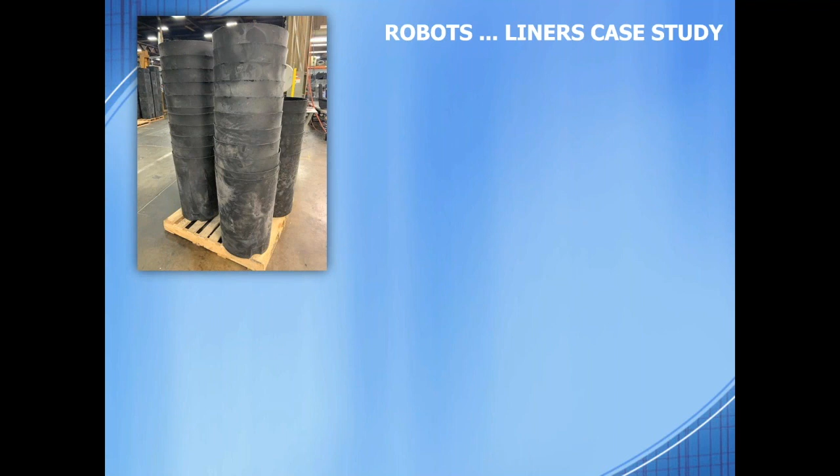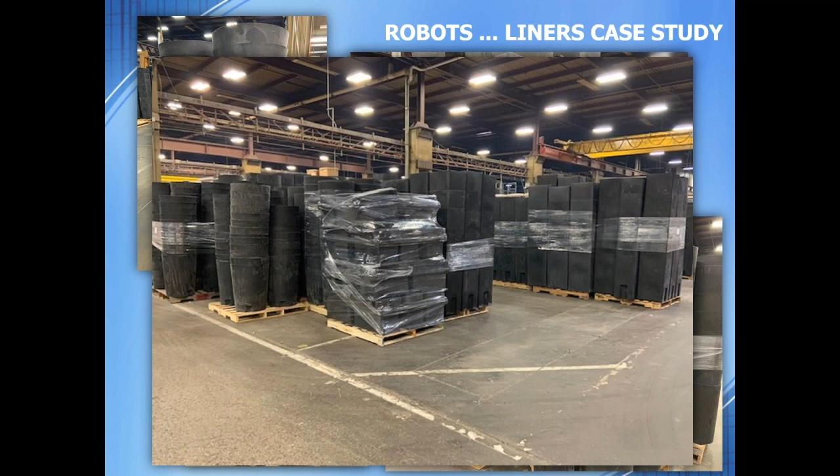We make a lot of liners. This morning I took a walk through our facility and snapped photos of liners—rotomolded, rigid, black, simple liners coming off our rotomolding machine. Here's a stack of liners, and another machine with 3 or 4 stacks, all in different stacks because they're different sizes, different shapes, or need to be cut to different heights. This is another sitting off of another machine. We've got a pretty big building, but we make perhaps 100,000 liners a year, finished at a variety of sizes. This is where most of our accidents were happening. Something as simple and non-critical as a liner was really becoming a thorn in our side as it relates to safety and accidents.

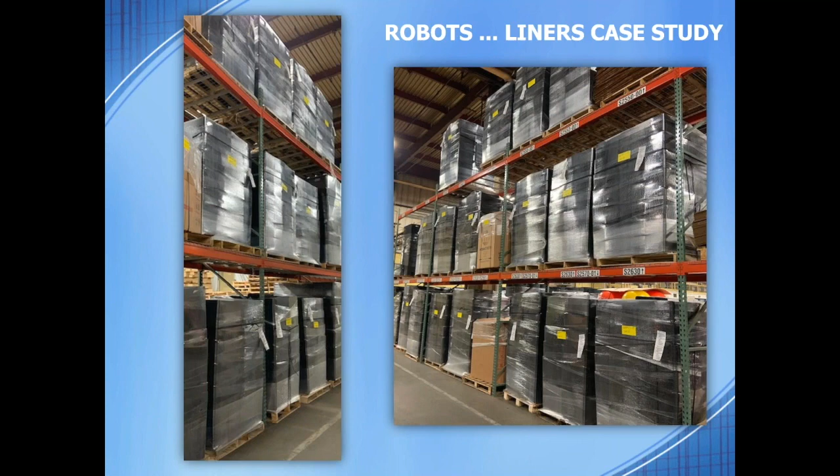So robots helped. Here's a couple other photos of finished liners waiting in our finishing department to be shipped out today, and then we'll repopulate these shelves for tomorrow's shipments.

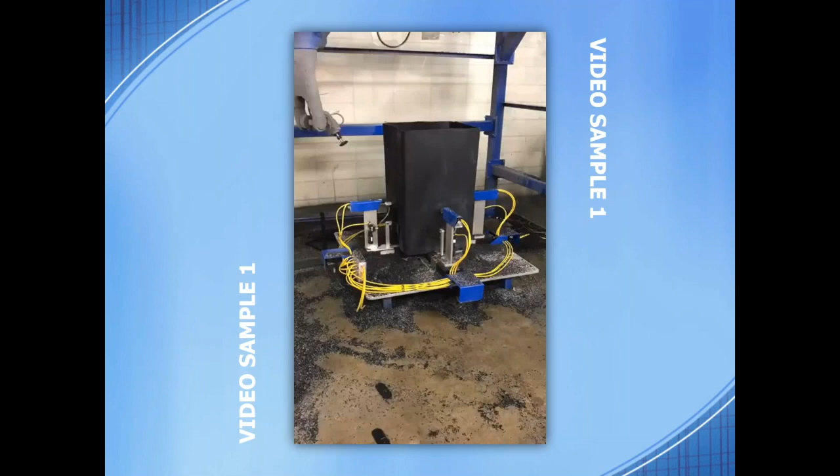Our first robot—some of you have seen this video, and those who have visited here have seen it. This is a higher speed video. I'll show it a couple times, but before I do, what you're seeing is a modular fixture. Each one of the front, the two sides, and the back—those pneumatic cylinders are sitting on linear actuators, so we can move those linear actuators in and out to get close to the liner size, and then the pneumatic cylinders finish the job and self-center the liner.

Here I'll show the video. It does two things: it cuts a couple hand pockets, one on each side, and then trims the liner to height. The operator brings it back in and out, engages the pneumatic cylinder, and the liner gets cut over and over. This one particular liner might get trimmed at 4 or 5 different heights. We sell them to the customer all at the same price, and sometimes the trim stock is a little more than other times—we just turn that trim stock back into liners.

This one is a little more complicated, but you can see the robot actually hovers above the part—we're hanging the robot upside down, which allows us to use a smaller robot and still achieve a pretty decent reach. Here's another quick case study for you.

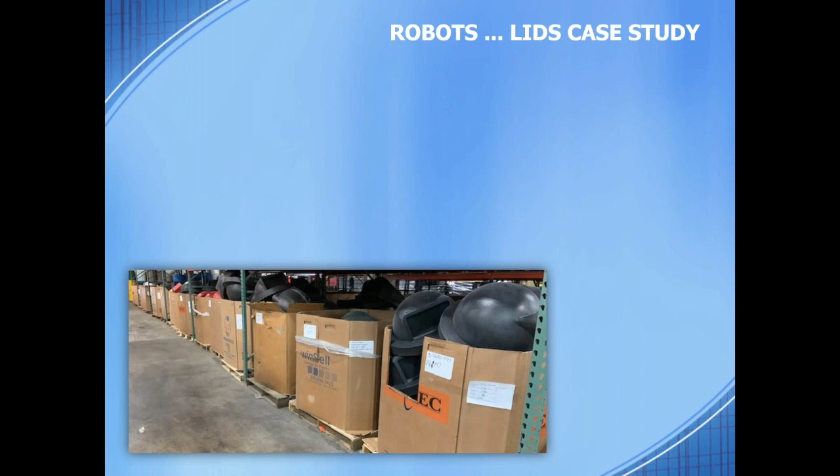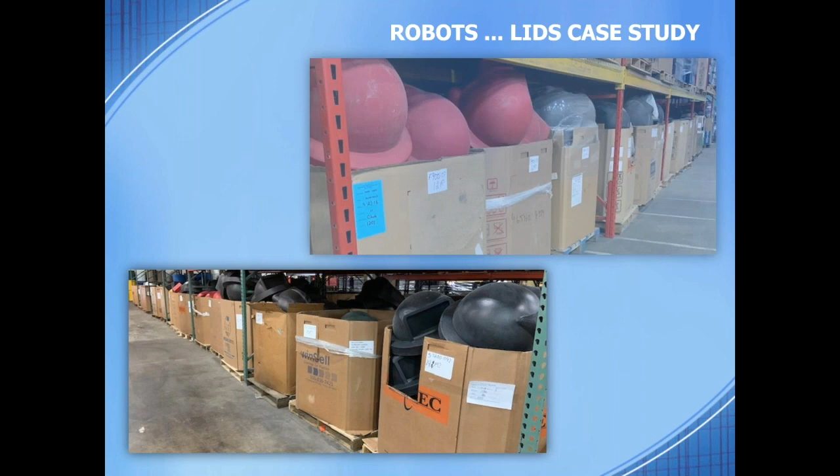We make a lot of dome top lids, like so many rotomolders do. I went out in the shop today and snapped a couple photos of lids that are molded and ready to be finished. We have the same struggles here—we mold faster than we're finishing, and we do a ton of these things. A couple different snapshots from our WIP inventory area, and these will all get finished. A lid will get snapped inside of them, and we'll either sell them as individual dome tops or in combination with a receptacle.

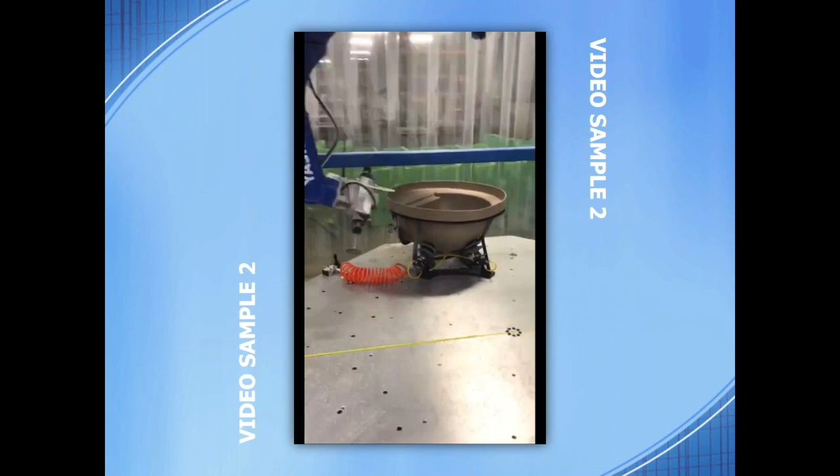Let me show this a couple more times to give you an idea. That table is not robotically controlled, so there's no automation there. The operator is manually rotating the table 90 degrees, 180 degrees each time, and after it's indexed, they tell the robot to go. So there isn't any logic between the table and the robot—we wanted to keep it simple.

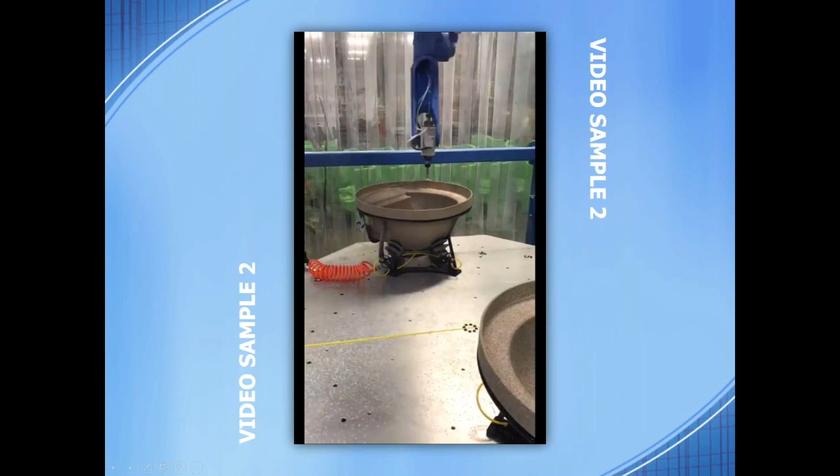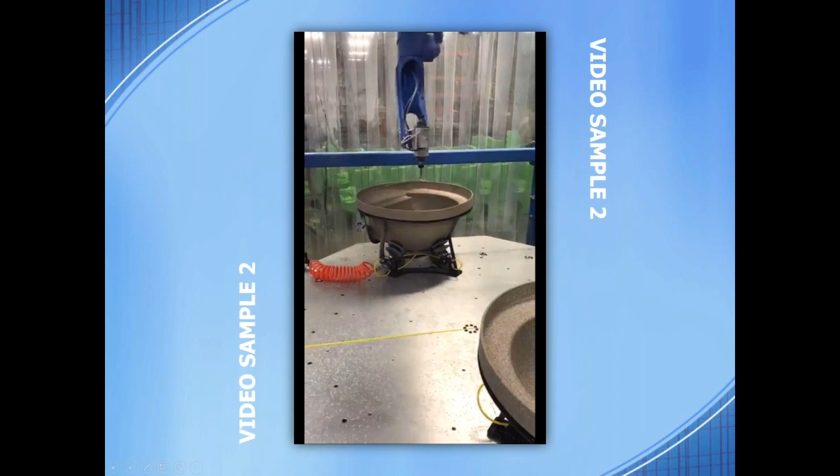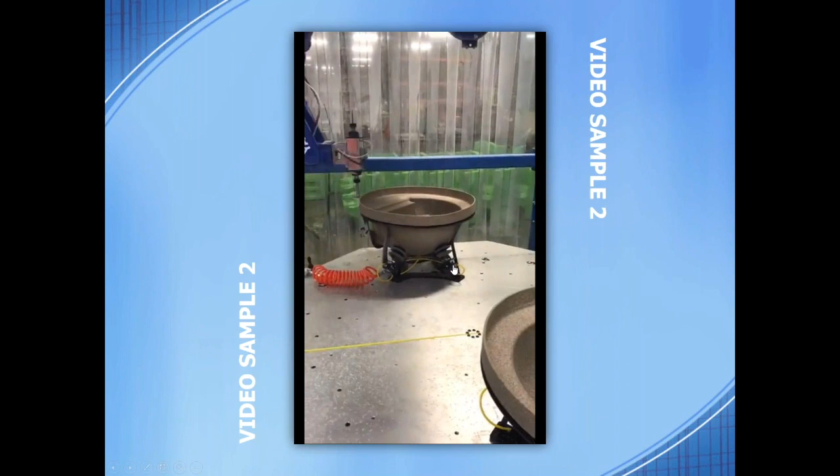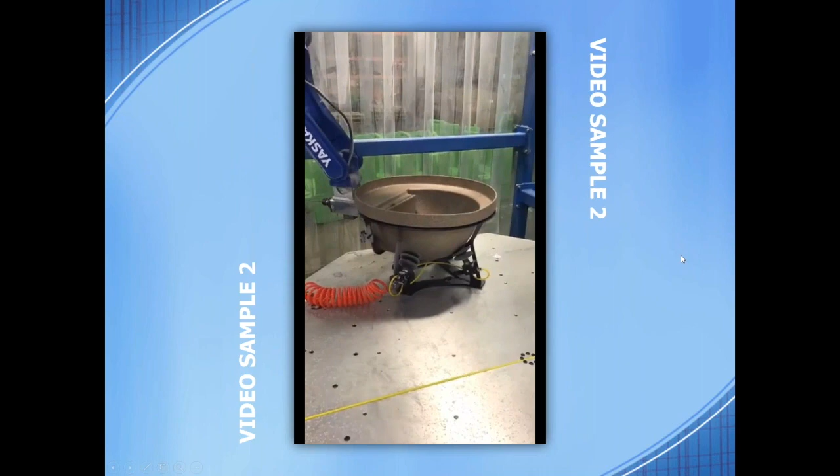We have a variety of molds that we're using to make these dome tops. And one of the challenges, and I think it needs to be said, that we've experienced as we've gone down this path is some things that never mattered before now matter a lot. The slight differences in our many molds that make these dome tops have never mattered before. Because we finished them manually, some of those differences never mattered, and or they could be easily and manually compensated for.

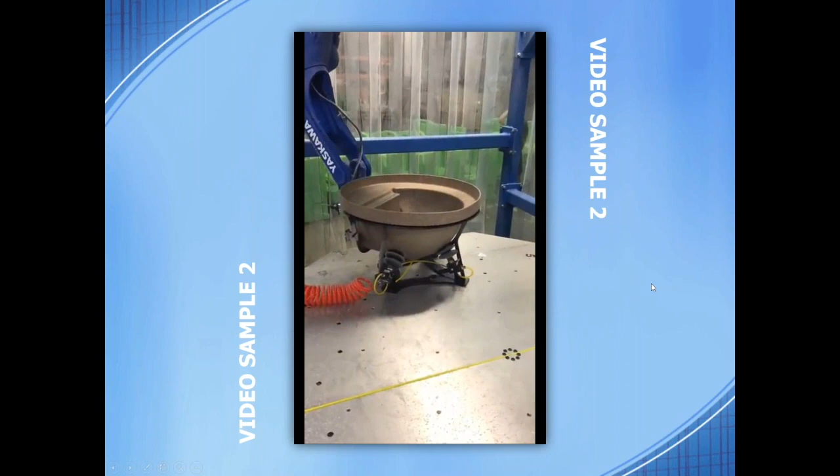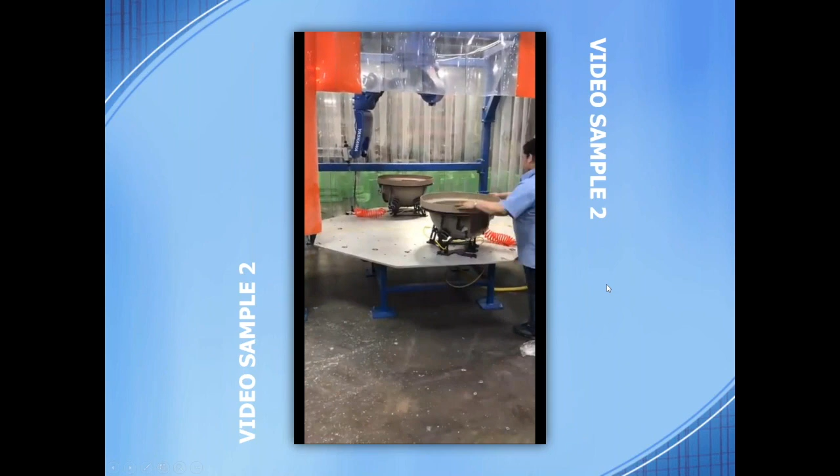As we've wanted to automate the trimming, those slight differences of a 16th inch here, difference between molds, are becoming very, very apparent. And so we have to get a little bit smarter about how we mount, how we design the fixtures, how we locate the part, and what our datum, our main reference is, so that some of those nuances from mold to mold kind of get filtered out. But that's been one of the challenges. When you're finishing manually, minor differences are easily compensated for. All right.

So with those slight introductions, we still have a labor shortage. We're not going to be able to fix that. But what's happened with these robots is our overtime in those two cells, the liner trimming cell and our dome top trimming operations, have gone away. We don't use any overtime in those two areas. In fact, not only do we not use any overtime, but we've reduced the labor by two-thirds. So what used to take a team of 3 people and sometimes even some overtime is now down to 1 person with no overtime in these departments.

Quality is super consistent, as you can imagine. They're all the same from part to part. We have had 0 accidents since implementing this, which has been great. We haven't had the same accidents with the saws and the routers, and as it relates to liners and the dome tops, no accidents, 0. And we've had reduced turnover because of all of it. And so again, I don't know what the proper order is in all of this, but we haven't solved this nationwide labor shortage, but we have compensated for it, and it's been pretty great.

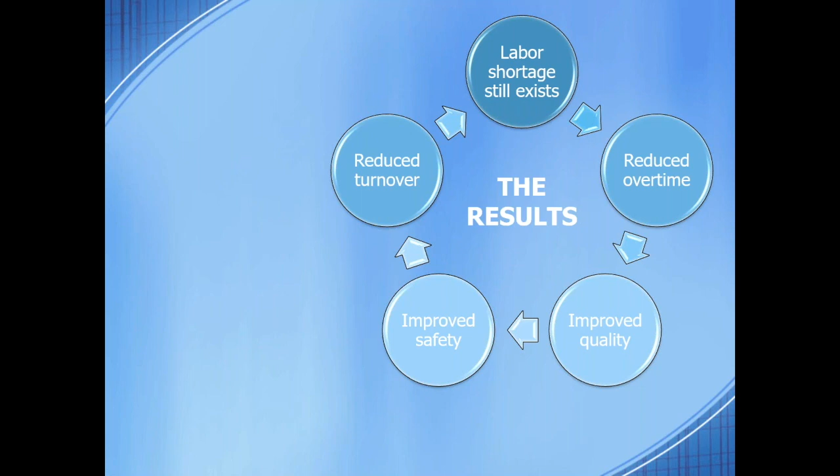So we're currently using 2 robots in our finishing departments with plans for 4 more. And anybody here on the call is allowed to come see it. We're going to have this single file line of robots, and each robot will be positioned near a rotomolding machine or 2. And it gets a little bit more challenging as you implement more and more robots, because the low-hanging fruit will no longer exist. The liners was a very low-hanging fruit for us just because of the sheer volume, the safety concerns, as well as the number of variety that we have with our modular fixture. It really all came together quite nicely.

The dome tops was another really low-hanging fruit, and we're working on 2 or 3 others right now that I would consider kind of maybe the low-hanging fruit. But as you continue down this path, you're going to get to the point where some things are going to be harder to justify on a robot if you're just focusing on safety alone, or if you're just focusing on throughput. When you put it all together, though, it's a little easier to justify. So it became obvious to us that these robots would be of benefit to others, not just us.

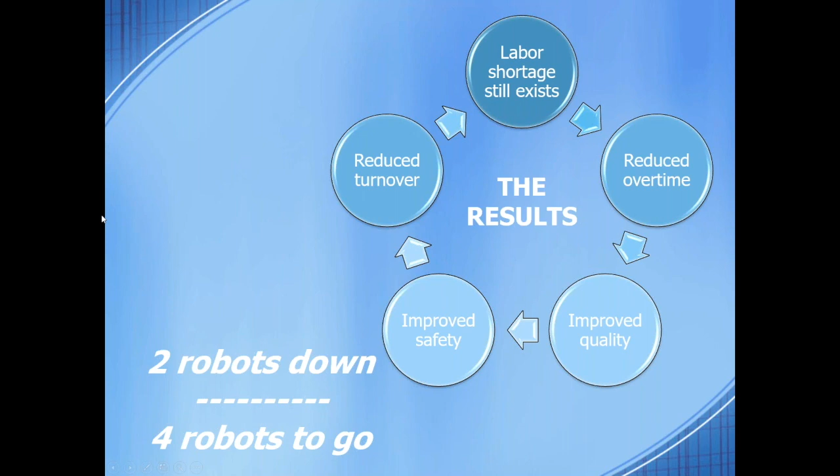So if you remember from the first slide, you saw 3 letters, AIT. That's Advanced Integration Technology. That is actually our automation division here at Celgent. It's a separate company, and we have now started marketing and selling these to other rotational molders as well, and blow molders actually.

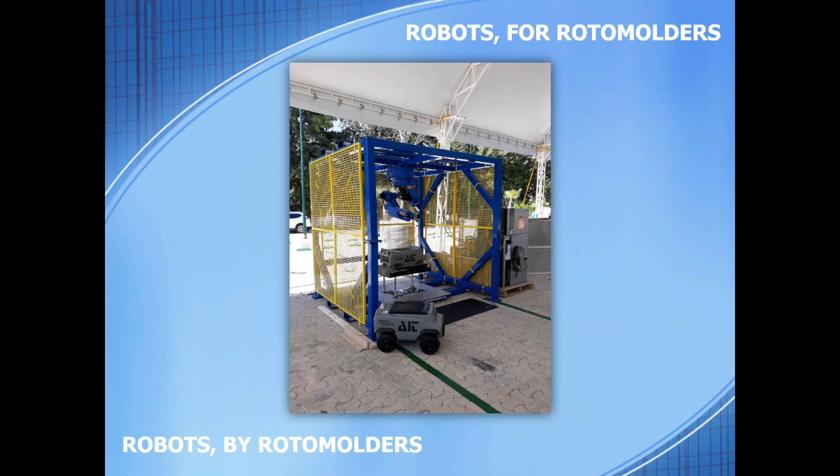We actually unveiled, for the first time publicly, a robot at Rotopolymer's Congress meeting they just had in Cancun earlier this month. And so it was down there trimming parts in addition to other rotomolding machines that were live and rotomolding parts, and there were machines grinding parts. It was pretty awesome to see all of this legitimate production happening outdoors, but our robot was there trimming parts for everybody to see.

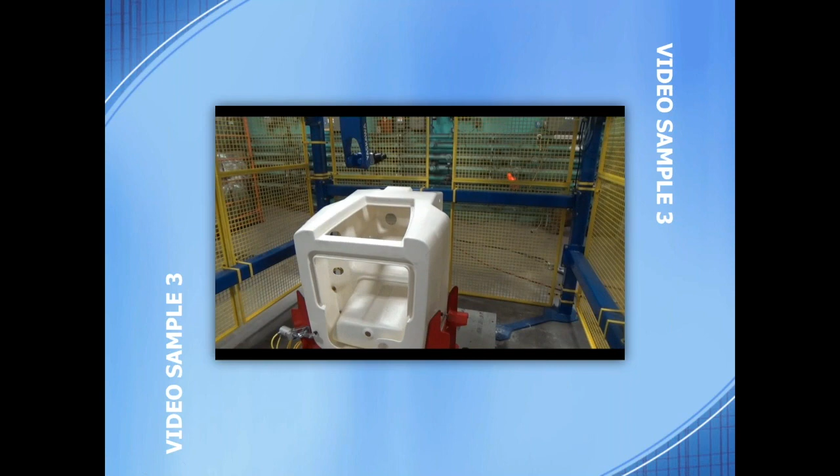So here's a video for you. This one is not in high speed. This is actually fairly slowed down. So a customer sent us this part, and we designed and built a fixture to secure the part, and then we used the as-trimmed part they supplied to confirm our program.

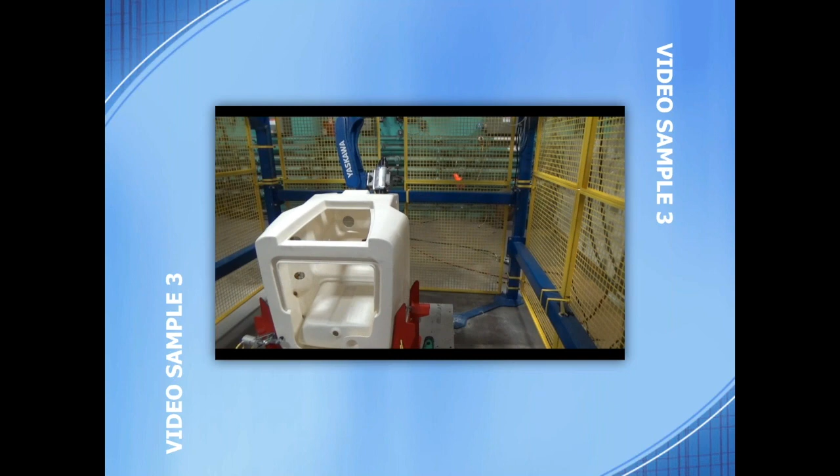And so we're going to actually walk around this while it's happening a little bit, so you can see our robot's actually following an existing cut path. There's no bit in the router. It's not actually doing any cutting. This was a video that we shared with the customer as we were progressing through the project. So this particular part used to take, I don't know, 15 to 20 minutes to trim manually, and this robot does it in 3.

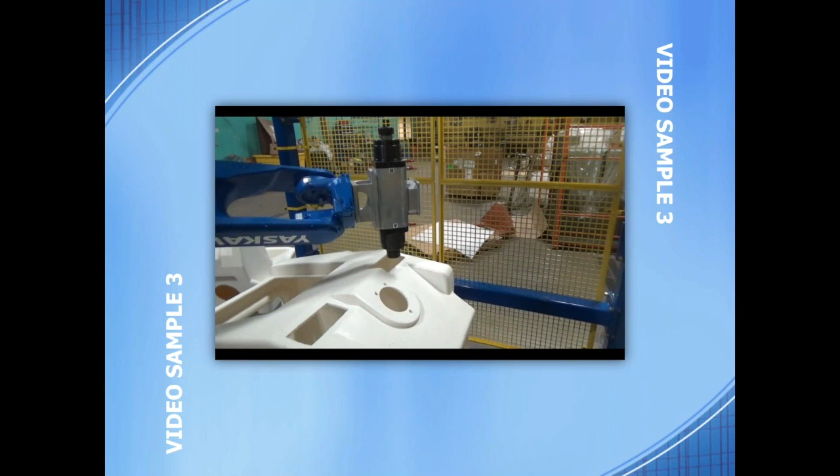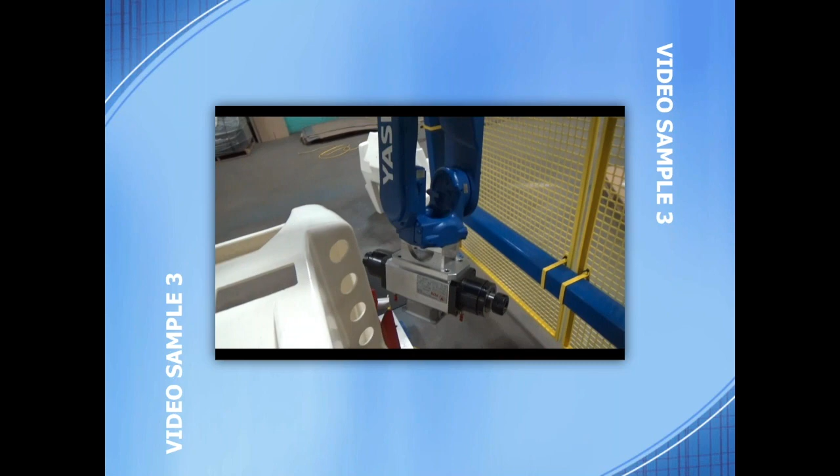So let's just kind of watch this. You'll see it following. There's some rectangular cutouts. There are some circular cutouts. We always try to pick a bit that makes the most sense. So some of the holes drilled will use one side of the double-ended router, and other cutouts will use the other side depending on what bit is required.

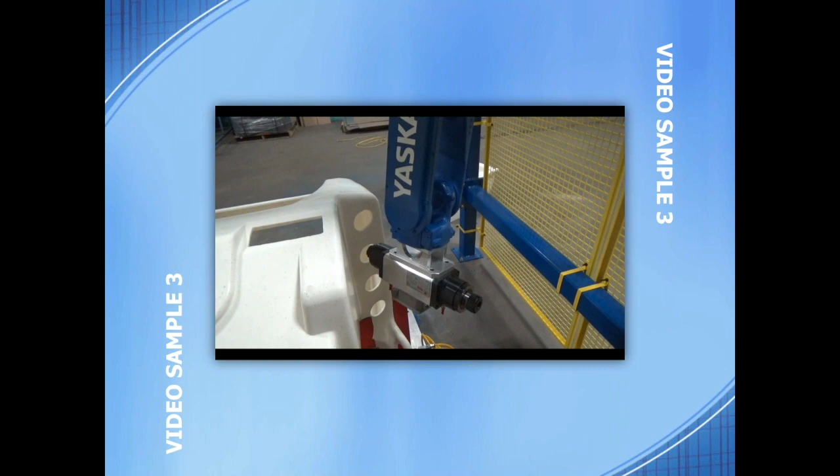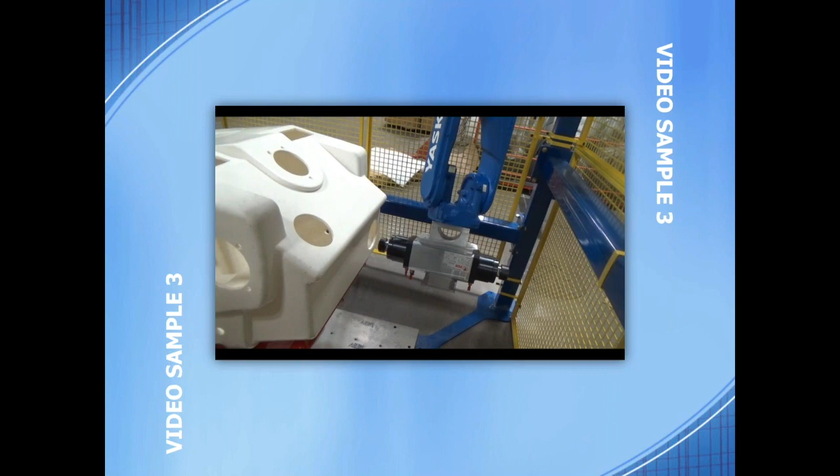So the motor's spinning the same direction, so one bit will be a reverse flute and another bit will be a regular flute. That way we don't have to stop the router and spin it the other direction, although we could. I can't tell you the customer. This particular customer has purchased 2 robots now. We were down there recently helping with fine-tuning of these programs. This particular fixture holds one part, but the part gets trimmed 3 different ways.

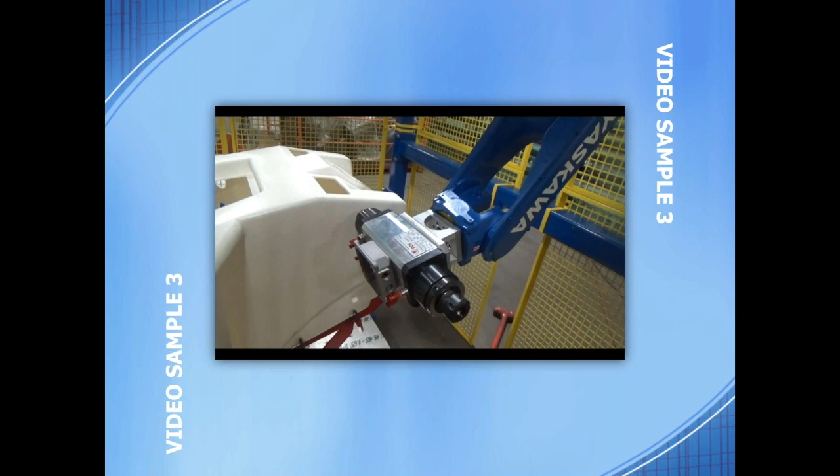Very advantageous for them. So sometimes when we'll drill a hole, if the bit is smaller than the hole, we'll cut the hole. In many cases, the hole is the same size as the bit, so all we have to do is plunge, and it cuts the hole. So the robots are all from Yaskawa, and our company AIT is an authorized distributor of the Yaskawa robot.

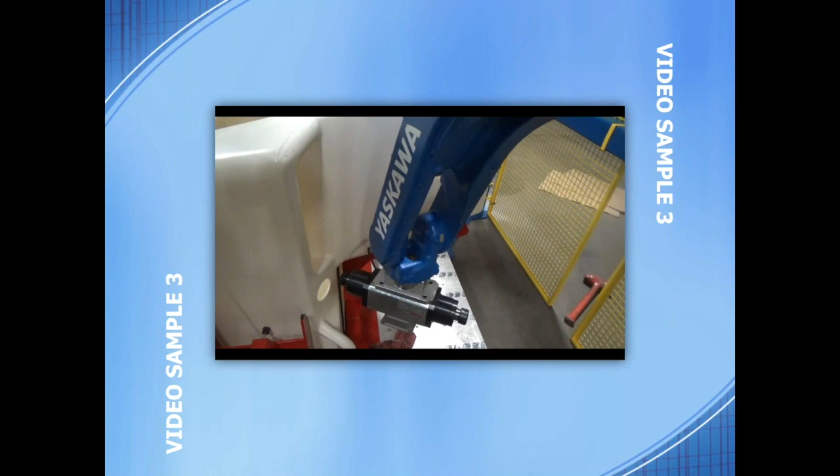So what we have is really a framework that's about 8 by 8 by 8 with a Yaskawa robot suspended from the middle and a control panel sitting off to the side. The programming is all done with a teaching pendant using an as-trimmed part as the initial pattern. So we don't utilize any CAD CAM. We can, but we have consciously chosen to pursue the least expensive path and the least complicated path for both us and our customers.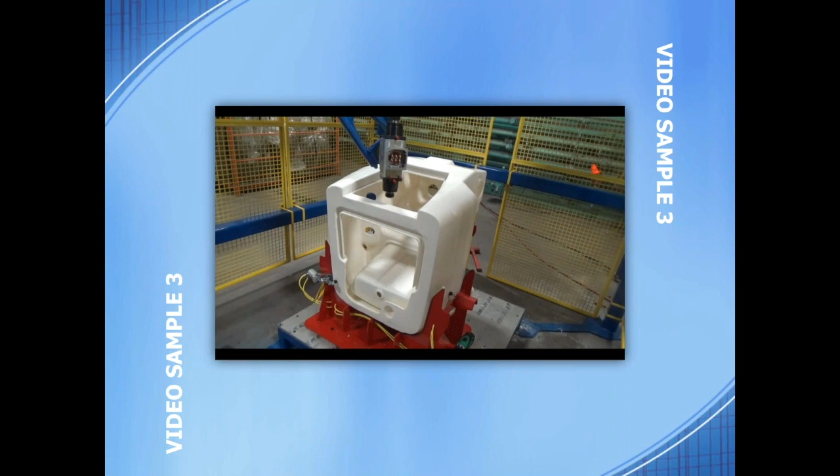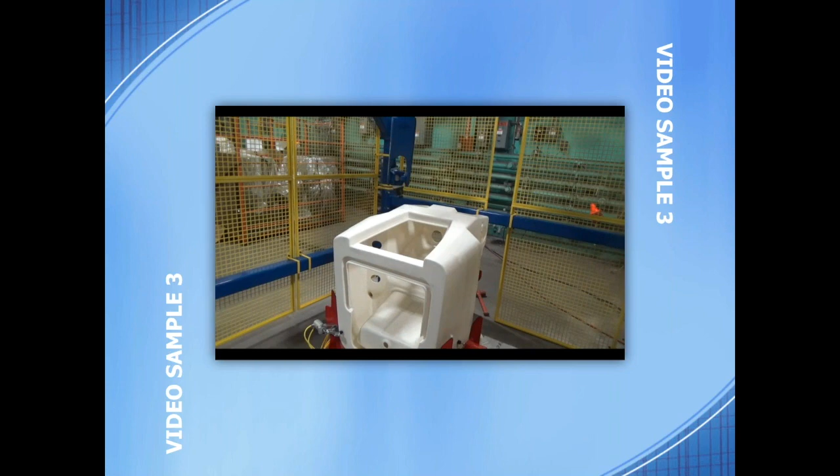I think this is the last cut it makes, is the top cut. There is a pressure sensitive pad at the front of the robot, which if stepped on will shut everything down. And then after it's done trimming the part, it goes back to a home position in the back corner. You can then unclamp the part, which is typically pneumatic, and put in a new part, walk away, and hit the go button, and it will trim for you while you're doing something else.

What we don't advertise is a robot that will trim flash. That becomes very complicated, and we've chosen not to go down that path. What we have done, which is pretty advantageous, is AIT will often sell fixtures before they sell robots, and that's because we have a lab robot. So even at Celgin, we will buy a fixture first. AIT will design the fixture. We will give them a part, trimmed and untrimmed. That fixture comes with the program, and then we get to go see if we like it.

And if we like it, then we would just in turn buy the robot that would go along with the fixture. And so that's actually been kind of our inroads to many other rotomolders, is to sell them the fixture first as, call it tuition if you want. They'll come and see the fixture running on our robot trimming their part. And typically what happens is they walk away having been converted to the idea of using robots to trim their parts.

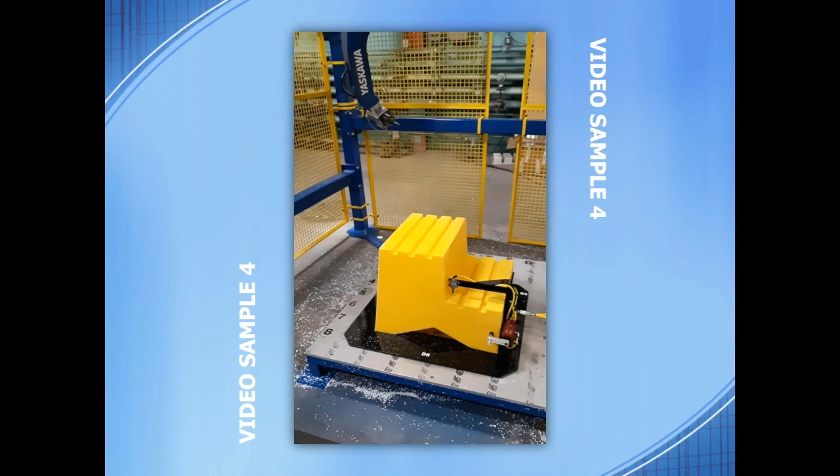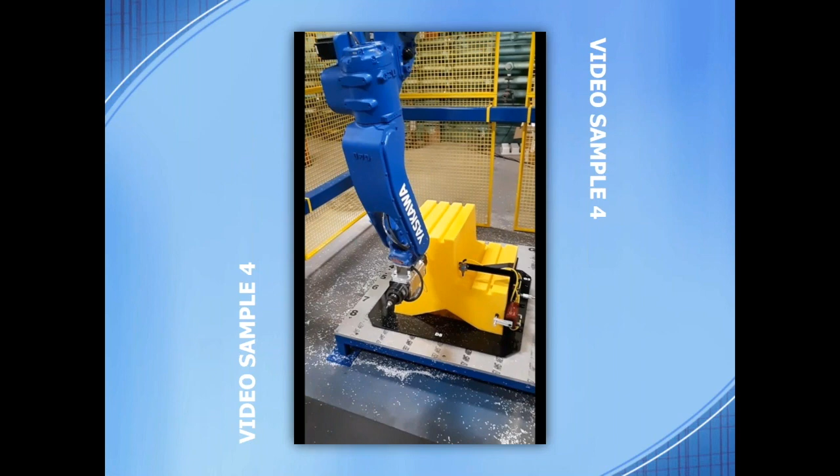Here's another one. This was on our lab machine as well. The customer sent us the part. We designed and sold them a fixture. Here, I'll see if I can get this into play. And then we did the preliminary programming here. It cuts a couple side pockets for holding, as well as it cuts the back out. And after this one was shipped to our customer and we went down and helped do the install, the program was sped up to twice as fast as what you're seeing now.

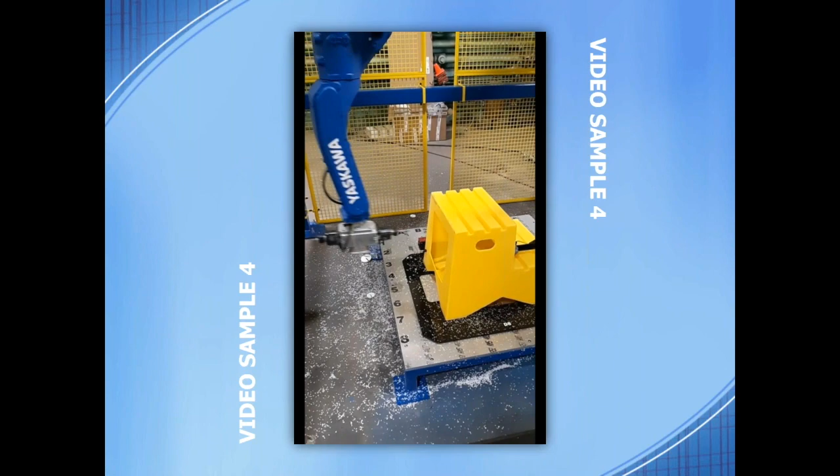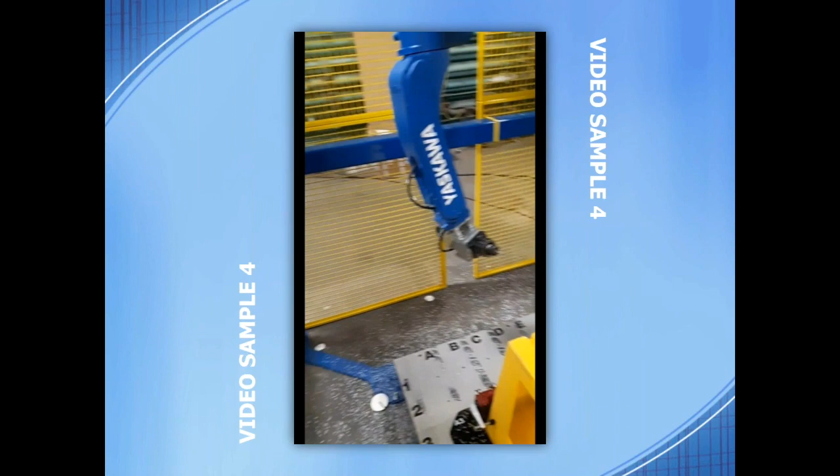This particular customer installed the robot right next to the rotomolding machine, and the part comes out of the mold and directly onto the robot and gets trimmed by the rotomolding machine operator, instead of going to a finishing department now. So it trims this second hand pocket, and then it will go to its home position. And after it's in the home position, it will allow you to disconnect the air, remove the part, and put in a fresh one.

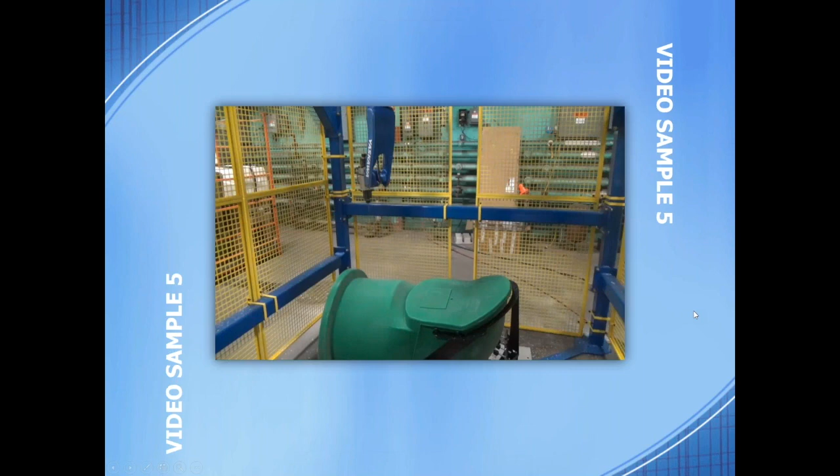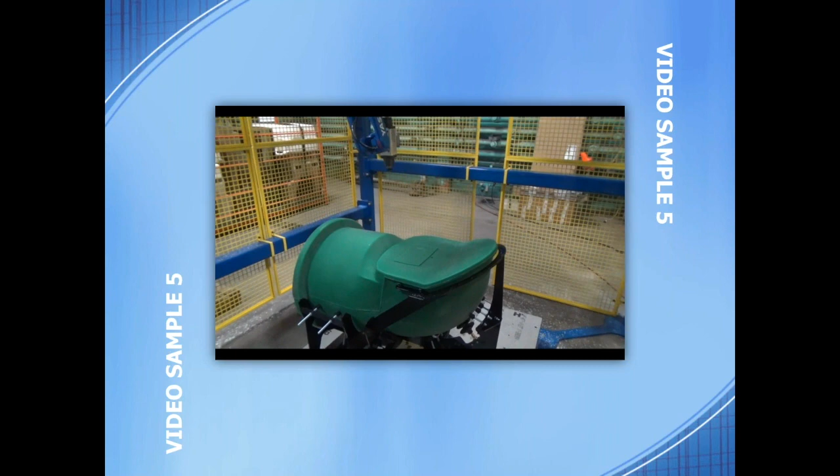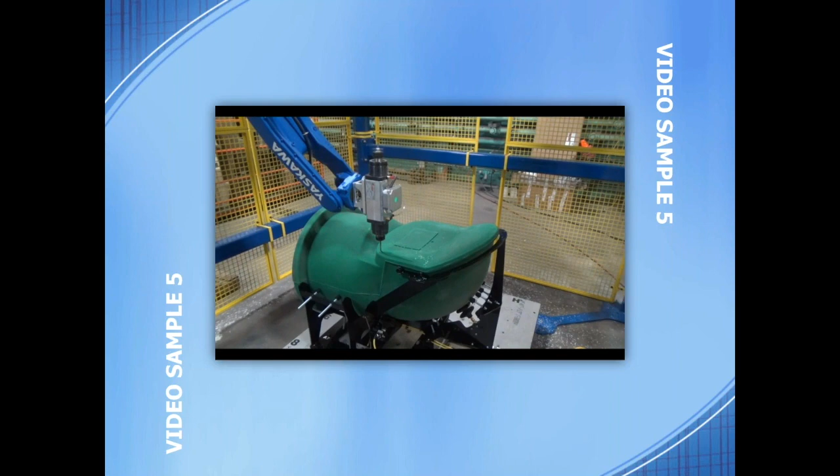Here's another part that we did for a customer, and this one was the same. We sold them the fixture first. You get a little glimpse of the air lever, but we sold them the fixture first, and they bought off on it and bought a robot. It's been nice though, simply because our experience is no different than anybody else can experience too. So we were our own guinea pig.

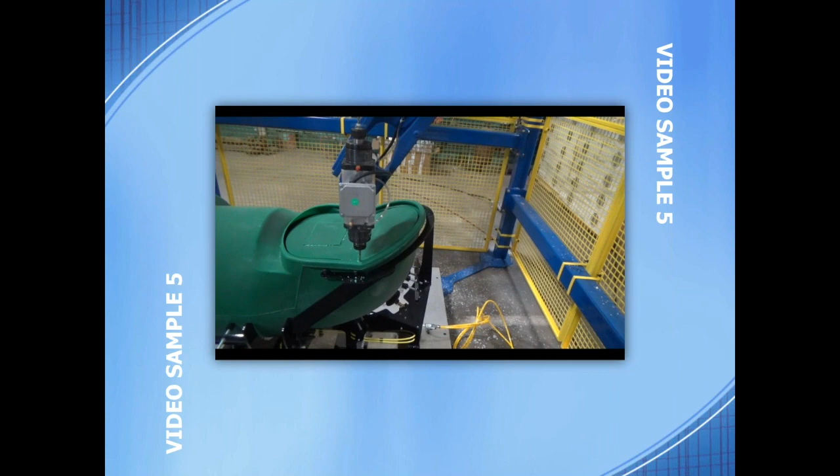Like I said, we've got 2 running all the time, 4 more in the queue, and in fact, our 3rd robot has now been developed and built and then subsequently sold to other rotomolders twice now. So someday we'll get it. So those are the 5 video clips. I wanted to show you 2 that we've had in-house and kind of explain the justification for doing it, and kind of give you a glimpse on what we've been able to do externally for other rotomolders.

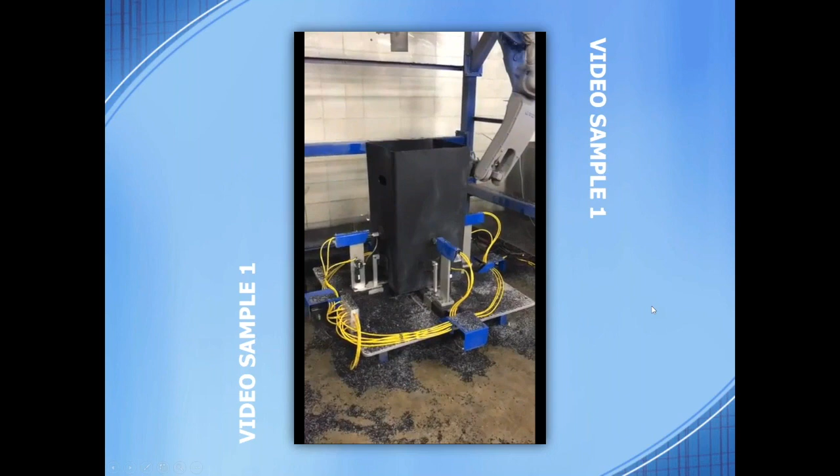This particular robot actually had light curtains, past tense. Sometimes the hand pockets that we were trimming and/or the top of the part would fly out of the liner and kept tripping the light curtains despite our attempts to fine-tune the light curtain adjustments. So we've since removed the light curtains on this particular robot, and we've put a safety barrier down in front. It's a pressure mat. So if you were to step on it, the whole robot shuts down within an instant. So that's in one particular case.

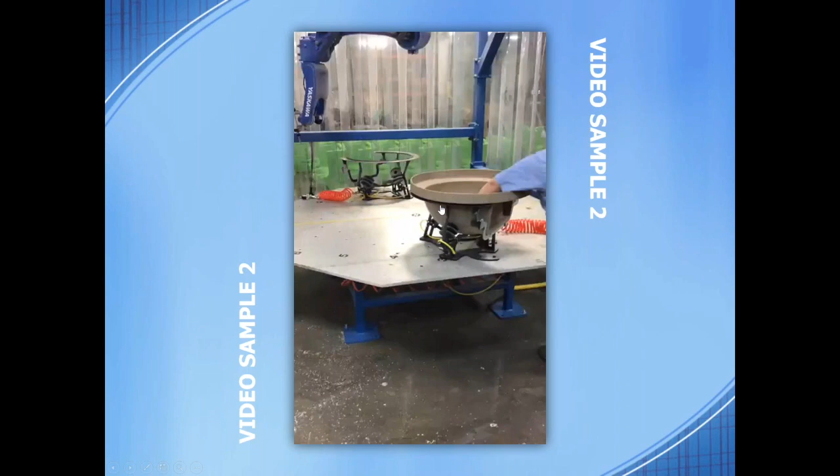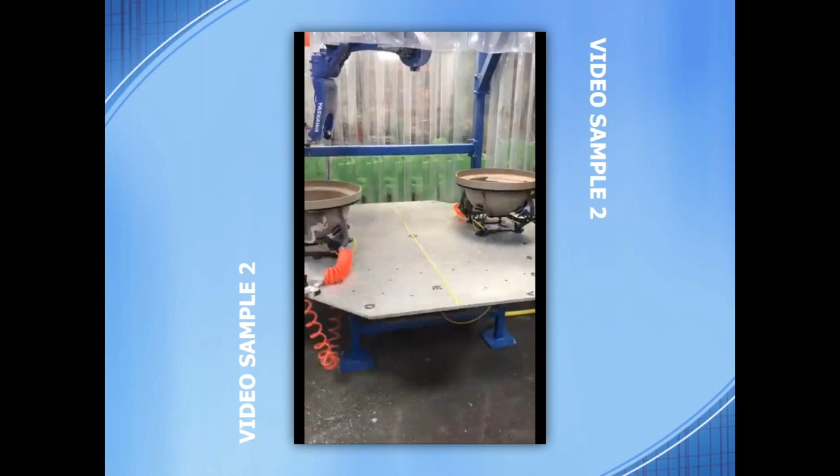In all of them that we have sold to other rotational molders, not Celgin, there has been the same pressure mat. Let me show you another quick video again. This one. Oh, there you go. This robot is behind; you can't actually access it. So you can see, and it's pretty wimpy, but we had just curtains initially, and 3 days ago we replaced those curtains with kind of like expanded metal.

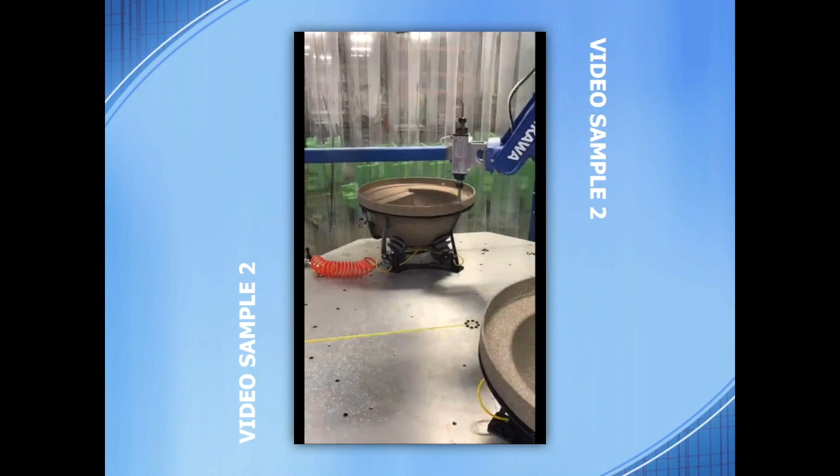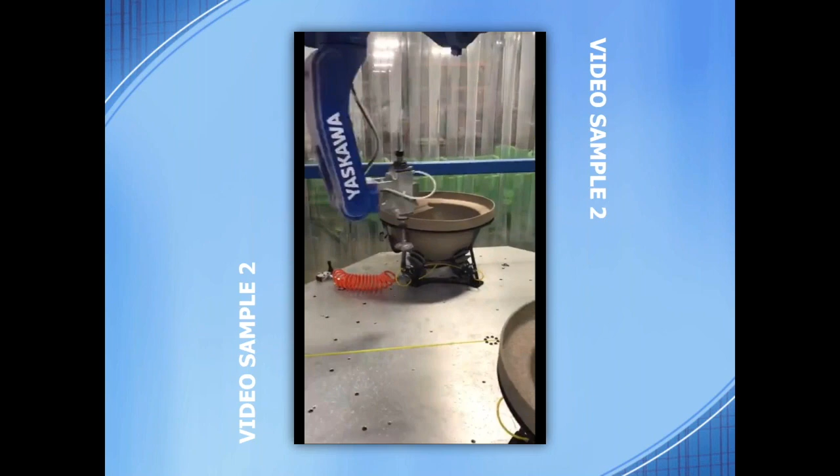It's not expanded metal. We have our own laser cutter here, and so we've laser cut and bent and powder coated our own safety fence that goes on the back, the right, and the left hand of the robot. And on the front, the turntable is such that you can't actually get past it. So the front fixture is actually the barrier to the back fixture, very similar to the way that most robotic welders work. So the back is a physical barrier bolted to the robot, and the front is either a pressure mat or, in this case, the turntable.

All right Drew, we have a lot of questions coming in. The next one: if you have multiple parts, how quickly can you do jig changes?

Pretty quick. So what we've done is there's a 10-inch bolt center on the table. Let me see if I can find this picture. These are good questions, by the way, I appreciate you asking them.

Right here, so the plate on the bottom of this fixture has a 10-inch bolt center, similar to Motion Master. And it's laid out like a map. All of the ones on the left are numbered, and all the ones across the top are lettered, so each hole has kind of an address.

I won't play the video, but each hole has an address, and this one is actually bolted to D8 and a few others in the back. You literally take out the bolt, pull off the fixture, and then put the next fixture in its home position using the bolt hole pattern, which is all part of the fixture design. Then you select the program and hit go. So it's minutes to change out a fixture. Minutes.

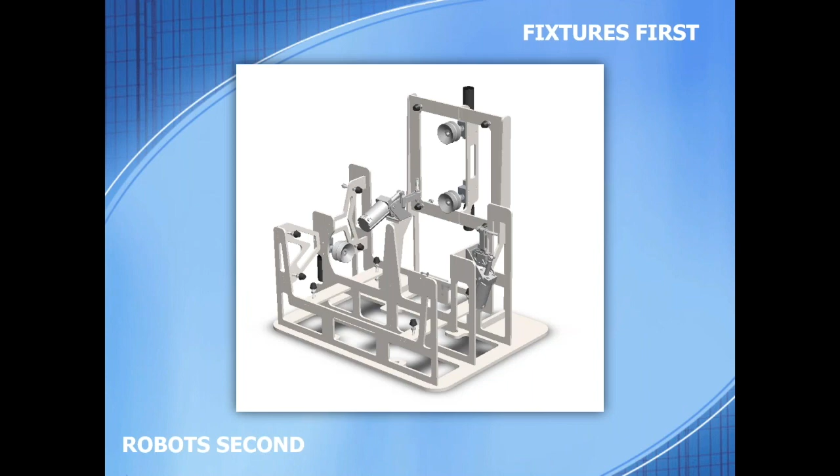This fixture we're building now is both complexity and volume. This one was totally complexity. Volumes are pretty low, complexity super high, and so they were able to justify it based on complexity and not quantity. Sorry, I don't have a better number for you, but it is kind of a moving target.

Why is flash trimming not being pursued using the robots? The next question is about tolerances.

When we started down this path, that was always one of the rebuttals from the existing automation companies. They would say, if you included vision cameras, we could not only pick up on any slight orientation differences, but we could pick up on any shrinkage variation and color variation, et cetera, seasonality, and auto-compensate for all of that. But then the robot's prices start to double when you implement vision systems, because then you need CAD CAM, and it gets more complicated than most of the low-hanging fruit requires. So we tried it at the beginning, but it became mold-to-mold variation, part-to-part variation, shift-to-shift, season-to-season.

It can be done, and a lot of automation companies are doing it. It just seems to be one of the frustrations in the industry, as soon as you go down that path, the price of the robot will double and sometimes triple. So what we've done is the person loading and unloading does the trimming of the flash either immediately before or immediately after the robot does the trimming. So it's just not something we've chosen to tackle.